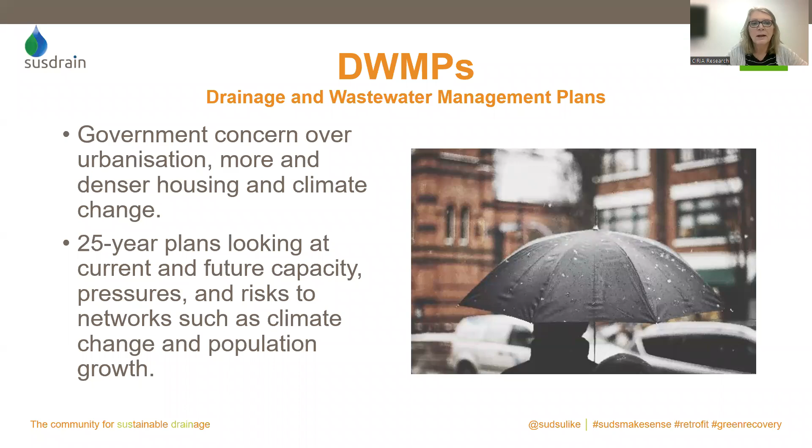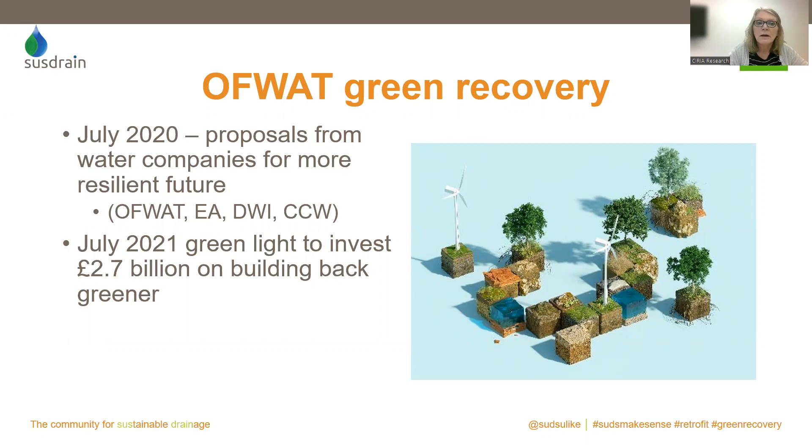So that's gone from the drivers to the detail of what's happening. We've also... Ofwat is the water regulator, and following the COVID pandemic, asked water companies for proposals for a more resilient future, and a year later gave the green light to invest money on building back greener. And these were some of the projects that were successful in being able to invest that money in green recovery projects, and we're going to hear about one of those very shortly.

The outcomes that Ofwat visualised were allowing water companies to take action on particularly pressing environmental issues, but while benefiting customers and helping to recover post-COVID, and trialling innovative ways of working. We've also got to remember the big picture, and had a conversation last night with a retired colleague from Yorkshire Water, who's also been very heavily involved in water strategy for a number of years, and reminded me that we should think about the big picture, that we need a resilient water environment for the future, and water infrastructure requires investment.

Only about 1% of the world's fresh water is easily accessible for human use, and we should look after that. But there are risks and opportunities related to water that will affect economic development and prosperity. And we should also remember that we're all aiming towards delivery of sustainable development goals, and we won't succeed unless our engineering, innovation and ingenuity create cities that people will want to live in. So thank you, Brian, for reminding us of that.

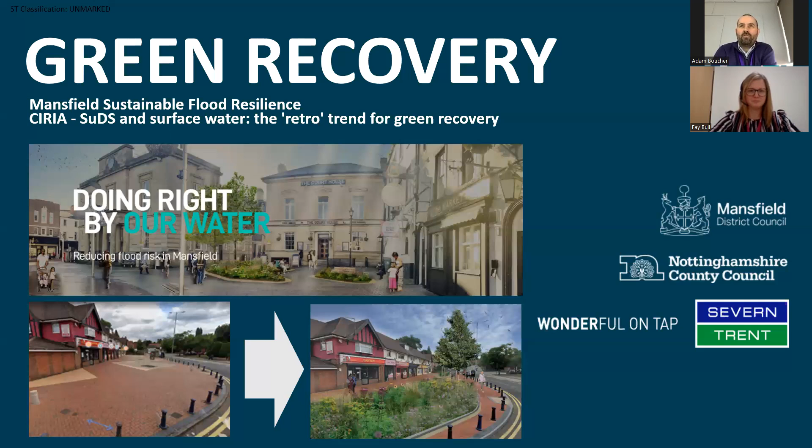Thanks, Fay. Yeah, so our ambition is to rewind the clock and retrofit in Mansfield. And effectively, as you can see on this first slide, turn some of these areas that were thriving verges and green spaces that have been paved over for maintenance reasons, the majority of them, into thriving verge rain gardens, etc. So you can see a good example on the bottom there. So we're investing £76 million of customer money as a result of the green recovery, post-pandemic recovery from Ofwat, on nature-based solutions to protect communities from flooding, 90,000 people in the Mansfield catchment. We're also going to get that secondary benefit of reducing storm overflow activations by taking so much surface water out of a network that is nearly wholly combined within the market town of Mansfield.

So we've got a local authority, Mansfield District Council, who are the planning authority, and also the neighbourhood town centre managers. And then we've got a highway authority and lead local flood authority in Nottinghamshire County Council. So it's a dual council, and we've actually embedded ourselves into Mansfield District Council's building to make sure that we're creating that collaborative team. So our objective is to provide 58 million litres of surface water equivalent storage. So that's a massive volume, never been done on this scale. And what we're hoping is this provides a blueprint for how we can manage flood risk in the future. And obviously it makes Mansfield a bit of a fresher, greener place to live as well.

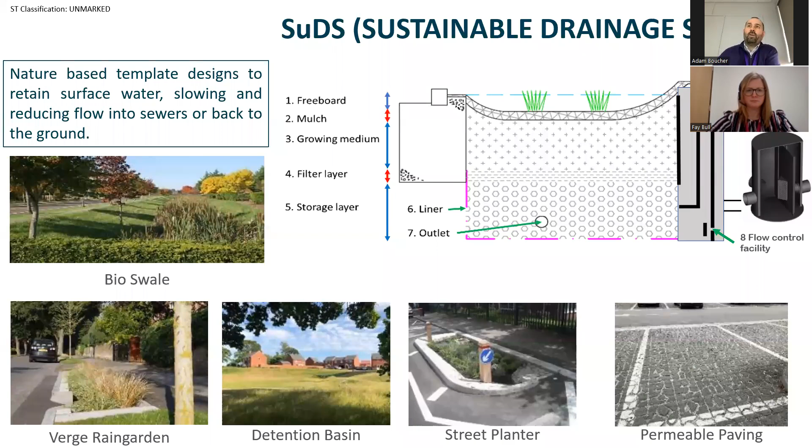Some of the benefits that obviously SuDS offer us is not just about reducing storm overflow magnitude or also reducing the flood risk. We're obviously looking in this project to develop many different additional benefits, such as cleaning the surface water much better than we do direct to the river at this moment in time. We also get an energy and carbon reduction, we think, where we can infiltrate, because we are currently pumping at the sewage treatment works to actually treat.

We're going to create some local habitat. But what I really like is the partnership funding opportunities that SuDS delivers, and I'll show you an example in a minute, as well as creating the health and well-being opportunities and green space, the town cooling, and then being so variable with regards to a large basin through to a small highway intervention.

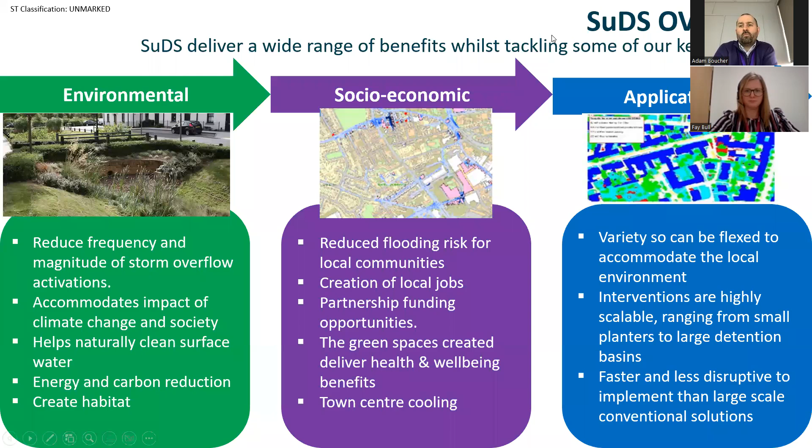So I just want to touch on the partnership side now and how we're working with Mansfield District Council from the master plan point of view within the town centre. So I think we've seen examples like this before, Sheffield, for example, where there have been schemes that are kind of about connecting people, creating place, making opportunities, and then also secondary managing water. Mansfield District Council are currently going through their master plan ambition, similar to what Sheffield did.

And they've got lots of issues because they're not, like Sheffield, a unitary authority. They are very much part of a dual authority with Nottinghamshire County Council. So there's more challenges with regards to managing their traffic within the town. And what we're trying to do is also bake their master plan in with our project. And we're already seeing some fantastic partnership working opportunities around that, managing the water as well as connecting people and creating place. Next slide, please.

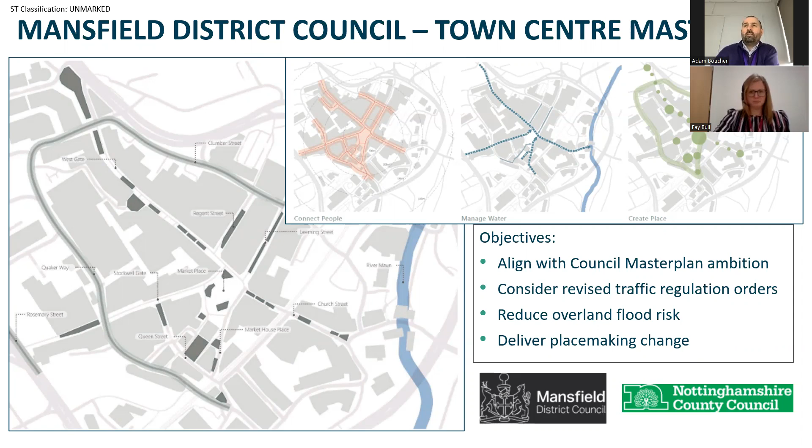One of those opportunities that has come around is this fantastic green space that we've created in an old car park. You can see from the top right hand corner, this is behind the old town hall, was the old indoor market. They knocked it down, created a hard standing car park. Now they're getting that out as part of their master plan ambition, is to remove the cars to the outside the inner ring road. And so they were originally just going to do a green space, tiered cascading kind of green space with some seating in.

When we got our award, we said, would you be interested in putting some verge rain gardens into your green space? And we could also, in the dark area you can see, which was the old loading bays for the old indoor market, which became the entrance, we could also get another large verge rain garden in there now, as well as on the front of the town hall at the side of the courthouse there, get a couple of extra verge rain gardens in.

And feed surface water, not just from the local highway environment, but also we've fed this in from the brand new bus station that sits behind the town hall, where they've constructed a surface water system that came directly out of the bus station complex and drops directly into our combined sewer. So we've managed through our project and their project to create this dual purpose, dual beneficial scheme that is going to actually store thousands upon thousands of litres of surface water now, not just provide that green space that was their original project.

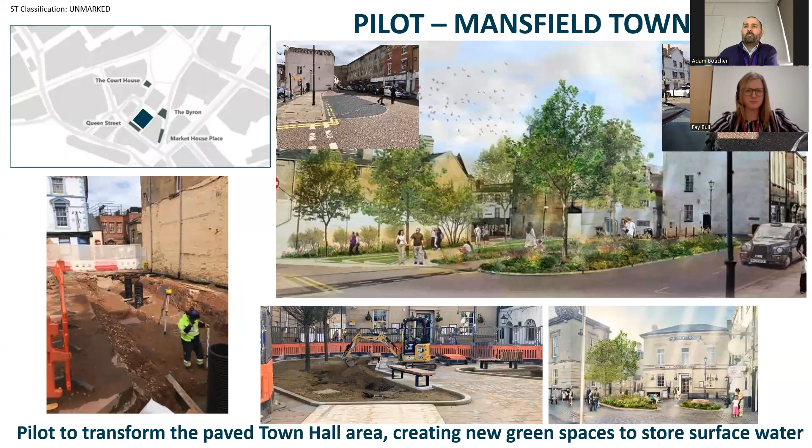And I think this is a real example of how SuDS projects, if they're promoted well, can tie in with town funding, levelling up funding, or green space ambition that local authorities have to create this dual opportunity. Fay, do you want to give us some examples of the residential elements?

Yeah, thanks, Adam. So in addition to the pilot studies that took place or are taking place in the town centre, which are about how we integrate those different opportunities, Adam tasked us at AECOM with looking at a residential suburb of Mansfield, an area called Ravensdale, which is to the southeast of the town centre. It was basically given to us as a blank canvas, and Adam's remit was you go and find as much as you can in terms of SuDS opportunities.

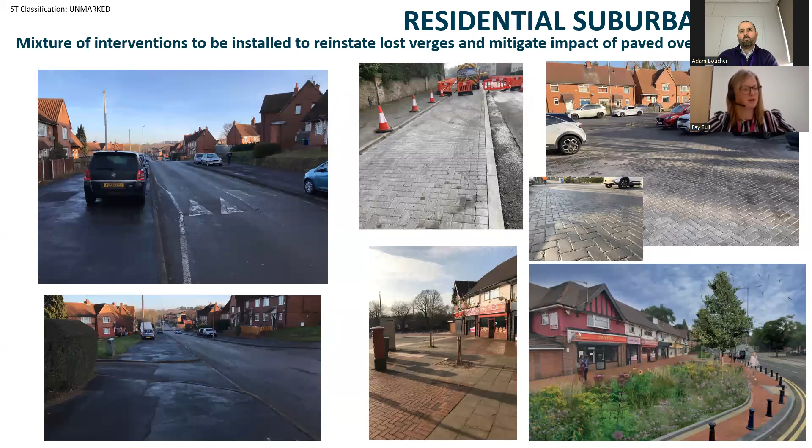So in the pilot phase, we got the low-hanging fruit, the bigger, juicier interventions, and then we went back around and we found a lot more interventions, but much smaller in terms of the return. And this is the end-to-end process that we are following. So the blue boxes there show you quite a normal design process.

So bear in mind here that when we pick up each of the catchments that we're working on, we pick them up as a blank sheet of paper, and we have to go through a desktop site selection process. And working with ARUP, Severn Trent and AECOM, all working together in collaboration, we've developed some really useful bespoke tools to help us to identify potential sites quickly, and then prioritise them so that we're focusing our design effort on the interventions that will give us the maximum yield.

We then look at desktop constraints, so utilities, land ownership and highway considerations, as it says there on the slide, and we're trying to move quite quickly into outline design. Now, to standardise and streamline that outline design, we've developed some template designs. As Adam said at the beginning, there were no standards to work from, so we've developed template designs for this project, and we've worked very closely with the Highway Authority, which is Nottinghamshire County Council, to make sure that we've got their buy-in to those outline designs.

And at the end of our outline design phase, we go through a review process with the Highway Authority to take account of any concerns or considerations from them. And then we move into detailed design. So the contractor picks this up at detailed design stage. And again, there's further discussions there and further sign off with the Highway Authority before it moves into the construction phase and the handover and closeout.

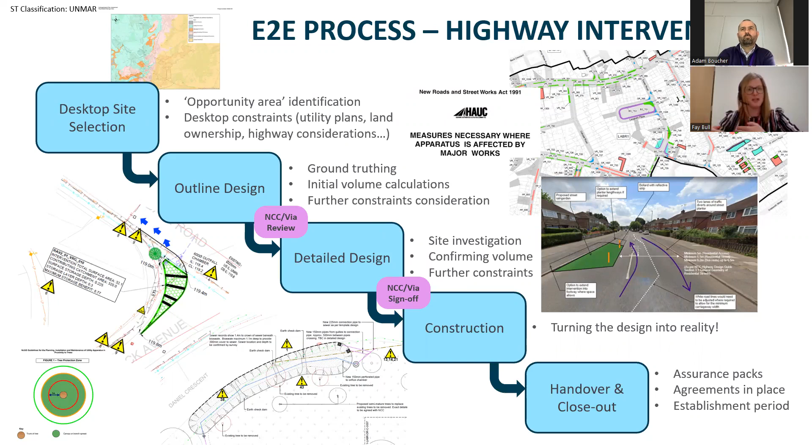So thinking about the whole of the town, the whole of Mansfield, how the traffic management will work when we're having to close roads or put in traffic management, that is a massive endeavour, and it's a very ambitious project to be working on. There's a lot of pressure, very fast moving, very handle turning in terms of trying to get a production line of designs that go through to the contractor to then start to build.

And then, in addition to the highways SuDS, we've also got a programme of detention basins. Now this particular detention basin has moved on a bit since this slide, but this is Racecourse Park. It drains an area of 13,000 metres squared. And for the 10-year storm, this is designed to contain 600 metres cubed, and it contains the 30-year event within its freeboard. So we are looking at these bigger, larger detention basins as well, generally in Mansfield District Council owned land.

So we're working very closely in partnership with Mansfield District Council to understand what their design considerations need to be, and what we are working with in terms of their land going forward. This catchment in particular is an already separated surface water network. It drops into the combined sewer, so we're proposing to take that out of the combined sewer, drop it into this detention basin, therefore reducing the amount of surface water going into the combined network.

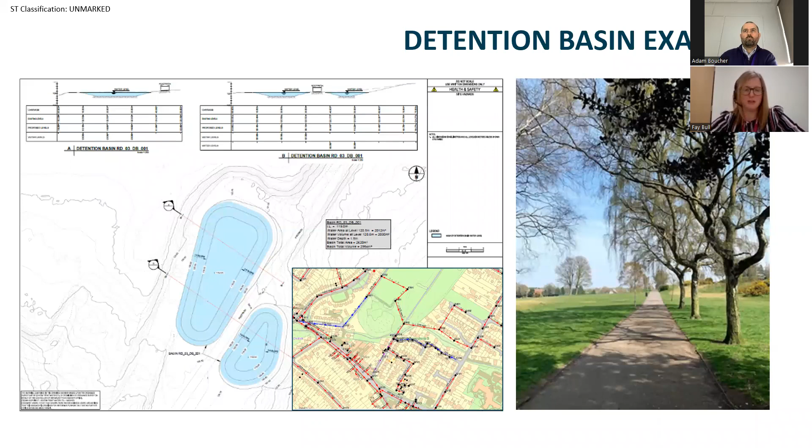Thanks, Fay. I'll hand back to Adam now to talk through some of the powers that are being used and the ownership and maintenance going forward.

Yeah, thanks, Fay. So we've got a really unique opportunity in Mansfield to trial potentially how we could in the future work as a water company intercepting other people's water. Fortunately, there's this section within the Water Industry Act, section 114A, which allows us to install drainage systems to alleviate the entry of others' water into the public sewerage network. So effectively, that's the power that we are laying them under.

And we will be adopting and maintaining everything that is green, so verge rain gardens through to bioretention tree pits on this graphic that you can see on the left hand side. The only two elements we won't be taking on, and Ofwat have made this quite clear, is that the permeable paving will be handed over to the Highway Authority, and that's the expectation. And thankfully, NCC have done a lot of work with us to take that on board.

And the other one is rainwater downpipe planters, where we will be working on non-household areas to intercept roof water with above ground installations, or even blue-green roofs where opportunities arise. So that's the other one that we won't be taking on as the authority, but we will be looking after everything else for life. So that brings me on to third-party contributions.

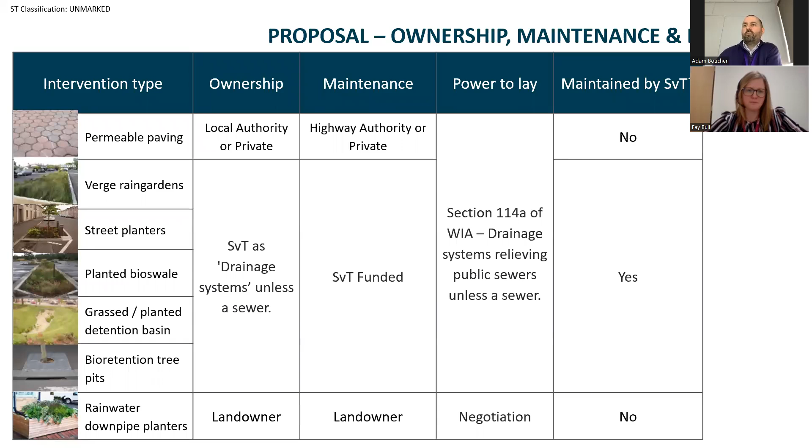We are providing 89% of the costs, that's £76 million. The expectation from the regulator is that the other 11%, effectively the top up from grey to green solution, will be provided by third parties that benefit from the scheme. So we've got lots of opportunity to work with our local authorities to try and get some direct contribution, although at this time, with the current cost pressures everybody's facing, that's really proving difficult.

But we do have some fantastic opportunities with match funding, co-delivery partnership. We've just seen a great example of that. And in kind, land value or advice or fees to be transferred. And then obviously the permeable paving is one element as well with regards to commuted sums and the authority taking that on. So there's lots of opportunities for people to contribute.

But also we think we've come upon something with regards to our non-household customers, our largest sites, where we can actually offer them a surface water incentive discount for their surface water charge, based on them allowing us to come onto their site and reduce their contribution to the sewerage network by a minimum of 30%. So we're currently exploring installing permeable paving, green interventions where possible, and offering a discount for a period of time, which would become their contribution. After that period, they then receive that benefit for themselves.

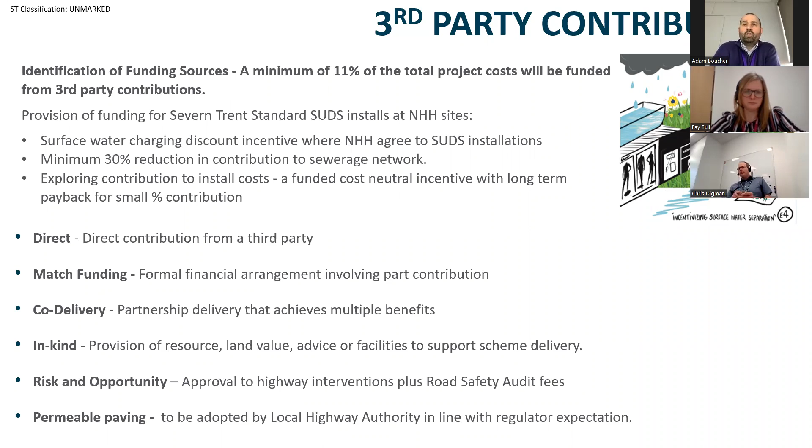And the last opportunity really is around developers with regards to brownfield development, and this is a great example where we're seeing demolished terrace properties with existing connections, brownfield sites. So it's an application that we would normally receive from a developer with a 30% reduced runoff condition placed upon it.

And what we're doing with the local authority MDC again is challenging them with regards to the construction of 77 new properties to basically do a Schedule 3 trial and hang on to all that water landing on that site within proper SuDS, not just direct gullies to flood risk assessment storage, but verge rain gardens and other interventions, with us trying to provide the top-up funding between their normal flood risk assessment storage and our SuDS standards that we would accept.

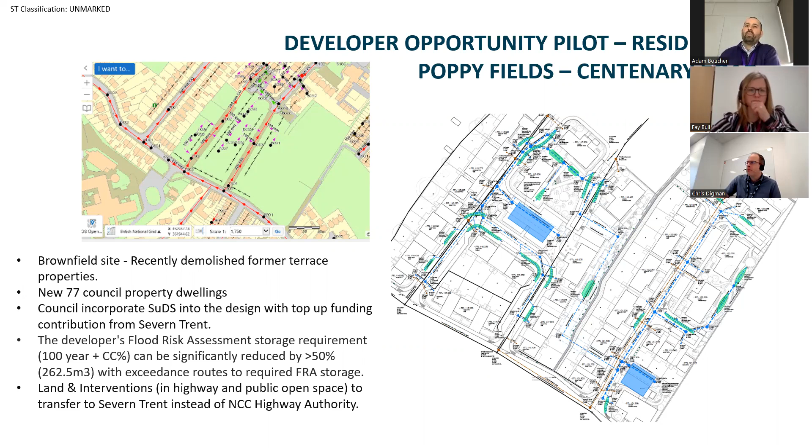So this is going to be a bit of a flagship project and something that we're looking to replicate throughout any brownfield development in Mansfield over the next couple of years. Finally, really just touching on the point that Chris made at the beginning around how important it is to engage with the local community, not only just from a consult and inform on what's happening, when it's happening and how it's happening, but also the big thing around this one is the why we are doing it. And I think that's where we can really build up support.

We're also looking to work with schools and community groups. We've already done assemblies at all 34 schools within the town. So we've got this real opportunity to engage and get support. There's obviously a lot of bad press at the moment, and a lot of interest around storm overflow activations and also flood risk. So I think this can only be a positive scheme, but it's how we go around and do the sell with regards to the interventions that are going in and build community support to not only understand the why, but also get bought into looking after some of these interventions in the long term.

I hope that's given you a bit of an introduction to Mansfield, and we're willing to take any questions. Adam and Fay, thank you very much for that. Really interesting to hear that and the progress of the journey that you've been on. We've got time for just one question. We're going to come back for a lot more later on, and possibly you may get the chance to type some answers to some of the questions that come in as well.

But if we just go to the one which was the hottest topic in terms of votes, from Amanda, asking how are Mansfield managing skills and funding for management/maintenance to ensure SuDS, especially planting schemes, thrive in the long term? That's an easy one, because Ofwat, the regulator, have made it very clear within the final determination that we've got a unique opportunity of looking after them ourselves. So that's the big difference. We can fund this through our forthcoming price review in 2024.

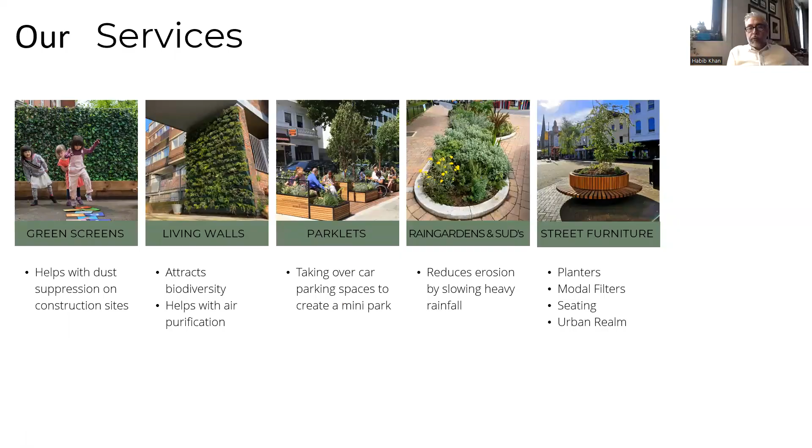Our services are broken into, obviously I'm going to talk today about SuDS and rain gardens, but we do a lot of street furniture, these very large planters. Everybody agrees we need more trees in our public landscape, but it's very hard to put tree pits in because of the amount of services around. Therefore, a lot of our work is overground. We do a lot of parklets as well, living walls, green screens, and green roofs as well. But today I'm focusing on our rain gardens and our work with SuDS. We'll start with rain gardens, and then look at the SuDS planters.

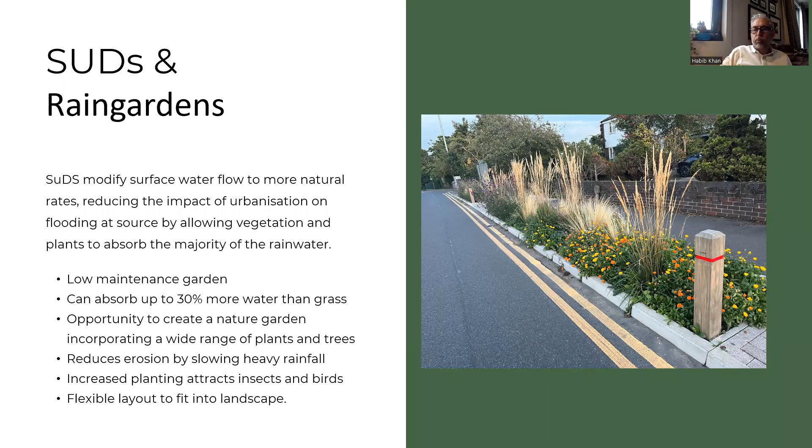This is becoming more and more popular with a lot of our Local Authority clients. If any of you are not familiar, rain gardens are essentially a form of SuDS that channel surface water into a specially designed water absorbent garden, planted with hardy perennials, designed to absorb excess rainwater, slow it down, and relieve receiving systems such as existing storm drains. Most of our projects are with Thames Water, so they're connecting to Thames Water sewer connections.

But they do more than just capturing rainwater. We incorporate plants that are specifically designed to attract pollinating insects. So they create a biohabitat, and we provide a corridor of biodiversity around urban town centres. We incorporate a lot of trees as well. It's a fantastic opportunity to incorporate trees whenever you're doing a rain garden. This is a drop curb rain garden in Hackney. We've done about 12 rain gardens in Hackney. We position them so they're appreciated by the public as a pocket park rather than purely functional.

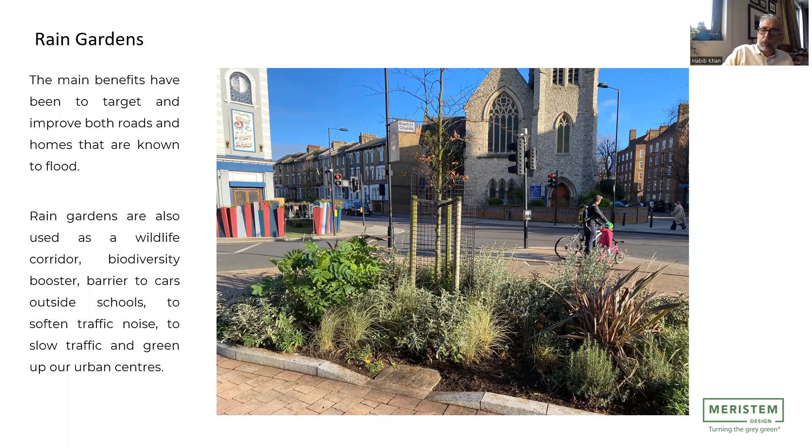purposes. One of the big things we've been involved in recently is community rain gardens. I think this might be a first, because these are rain gardens which right from the outset are carried out in collaboration with community groups. There are hundreds of community groups across London. A lot of them are registered. They work with local authorities, and this was right from the outset.

We did the planting plan. We sent them the planting plan. They had a look at it. If they wanted to make suggestions about their favourite plants, they could. We looked at their plant selection, and if it was suitable for a rain garden, we'd include it in there.

This was the day we actually did the installation of the rain gardens. A lot of the residents on the streets came out. You can see the cones in the background. We closed the road as well. So they kind of played around with the planting plan, which is fine. They have that say in it. They have their ownership on it. Some of the plants, they actually went out and selected, and it was very, very popular. So they had ownership right from the beginning.

This is called the Coppermill Community Group. There's about 22 rain gardens in one area of Waltham Forest, and it was done with London Borough of Waltham Forest Council. But engaging with the community on the day itself is important. So if you can get children out there, get them out. Then we did close the road for the day, and the feedback from that was really great. And we rolled this out to more and more communities throughout London. So this was the first one.

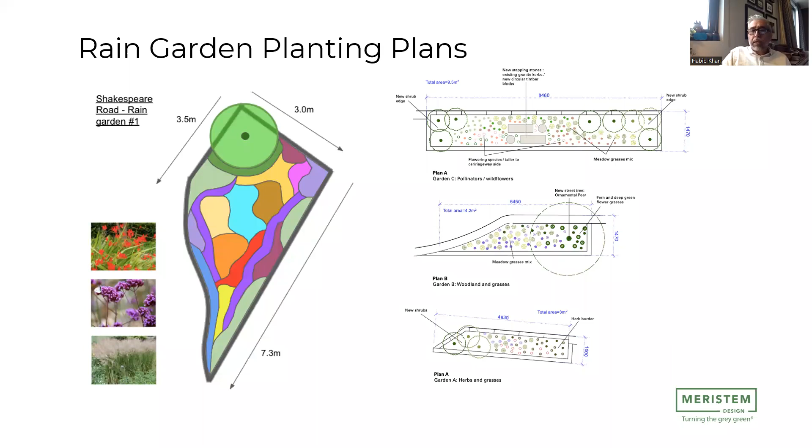We will do a planting plan as well for our rain garden. So again, if there's trees going in there, if there's herbs going in there, whereabouts are they going to be positioned in that particular area? So you need to be careful. Some people like to have height toward the back of the rain garden. You need to be wary when you've got cars in that area. You've got areas here, for example, with stepping stones through the rain gardens, and we've got rain gardens specifically designed with seating inside. So it is like a mini pocket park on the end of your road that the residents can enjoy. But yeah, a good planting plan to begin with shows you where the different plants are going to be incorporated into that area.

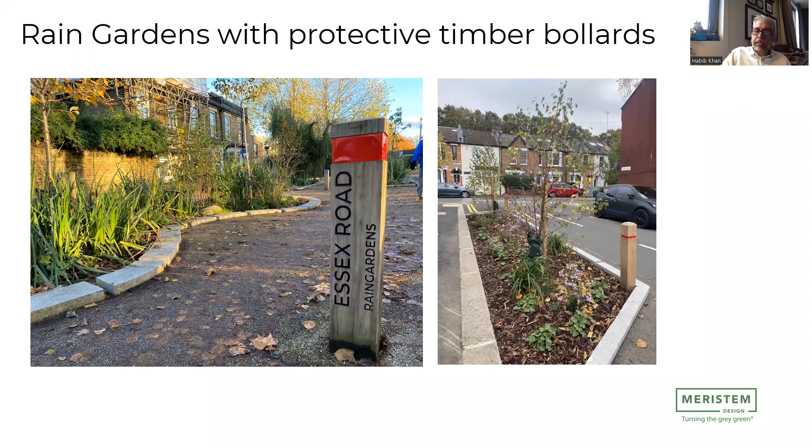We do use protective timber bollards, especially if you're going to put them onto the road, because you will get vehicles. You can picture a delivery vehicle reversing into the rain garden. So having the timber bollards works really well. This is Waltham Forest again. This is the Essex Road rain gardens, and it also provides an identity, and it tells people it's a rain garden. We do have other rain gardens with more information about the plant species used, so the residents can look and identify the plants in there. So it's useful to have the timber bollards.

You can retrofit tree pits into rain gardens. So this tree's been there for quite a few years, and what they've done is adapted the curbstones around it and turned it into a mini rain garden.

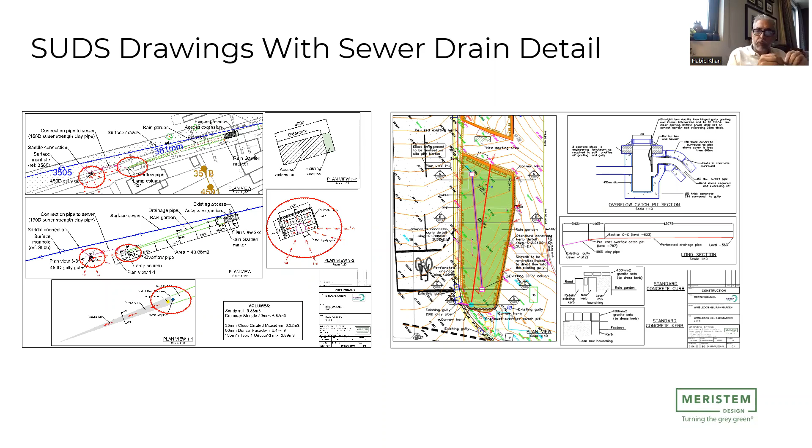As I said, there is a school on the right, so it does cause a lot of problems when this does flood. So this is what it's like before we came in there. So we work with Merton Council and Thames Water. They provide the rainwater sewer pipe connection drawings, told us where they were, how deep they were. We then did the technical drawings. So our own engineer drew the SuDS drawings.

It's very important to have the right level of freeboard, the right amount of compost and soil, and then how it's connected into the perforated pipes connected into the existing pipe sewers themselves. For the drawings we did, we supplied them. Merton Council's own contractors did the excavation works themselves and connected it into the pipe work, but we came along, did the shingle, the membrane, the soil, and the landscaping.

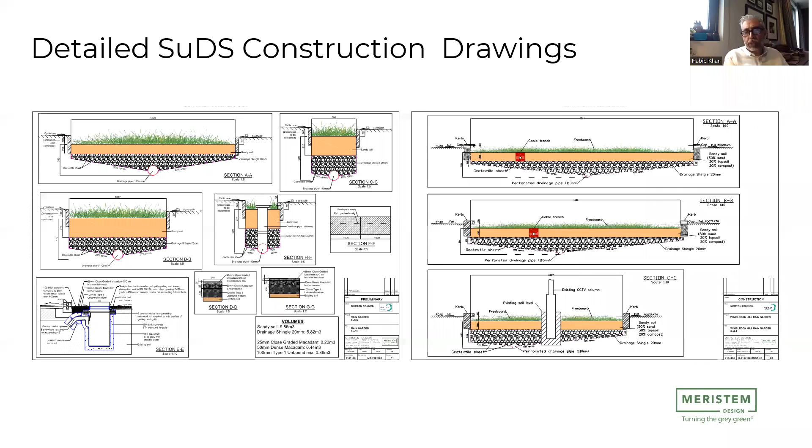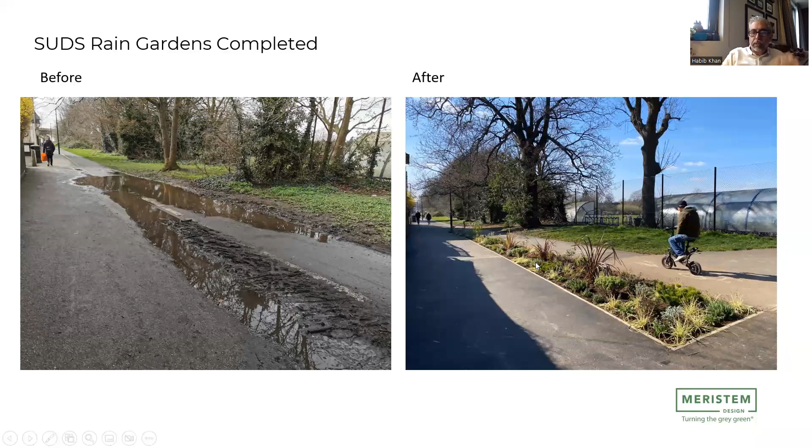So this is what it looks like afterwards. Huge difference. To date, so far, they've not had any standing water. There is a Thames Water sewer pipe running directly through this particular rain garden. It's connected with the pipe work into the sewer connection.

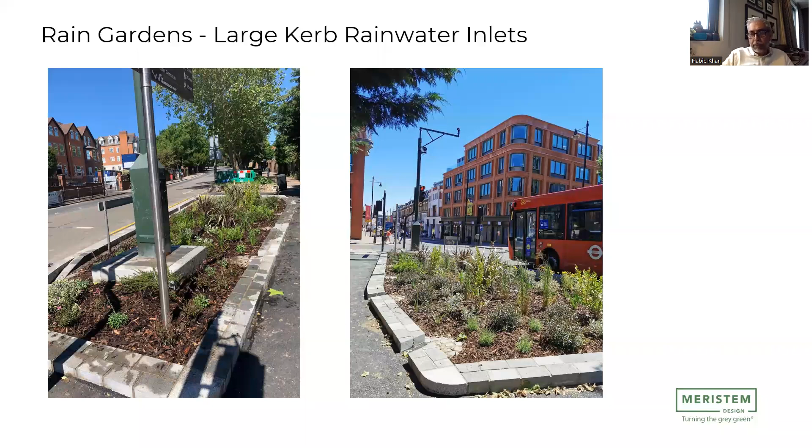Make sure you have sufficient depth. We've seen a lot of rain gardens, and the actual soil is level with the kerb, and you just can't believe why they would do that. You do need a minimum 200 to 300 millimeters depth for the freeboard, and then that allows the rainwater capture to be sufficient.

And having the right ratio of the soil is also important as well for the substrate. So here, this is according to the LDA design, which is fantastic. Which is what we use: 50% sand, 30% topsoil, and 20% compost. That is the same mixture that we use ourselves as well.

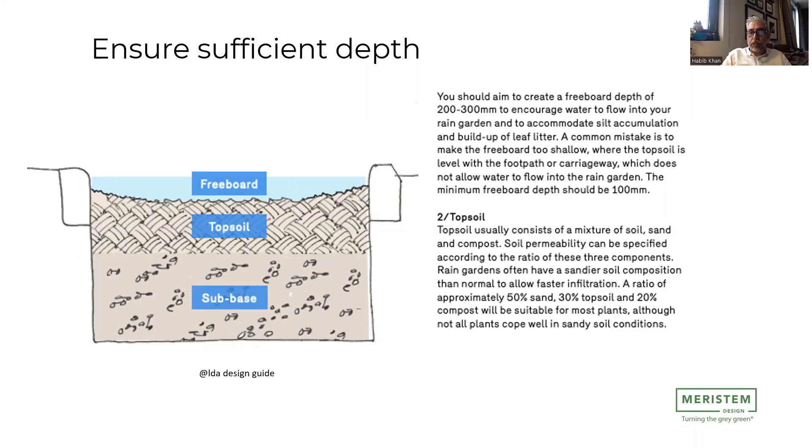Maintenance, it's very important to have the maintenance. I think this is often overlooked. You have engineers, you put it in there. That's the easy side, but who's going to maintain it? Rain gardens are not self-sufficient. In the first year in London, we go out 30 times a year.

Perhaps if you're further up north or out west, perhaps it rains more often. You don't need to go out 30 times a year. But in the first year, we do go out 30 times a year. Second year, it drops down to about 15 times a year. And then you can get away with maybe half a dozen times a year.

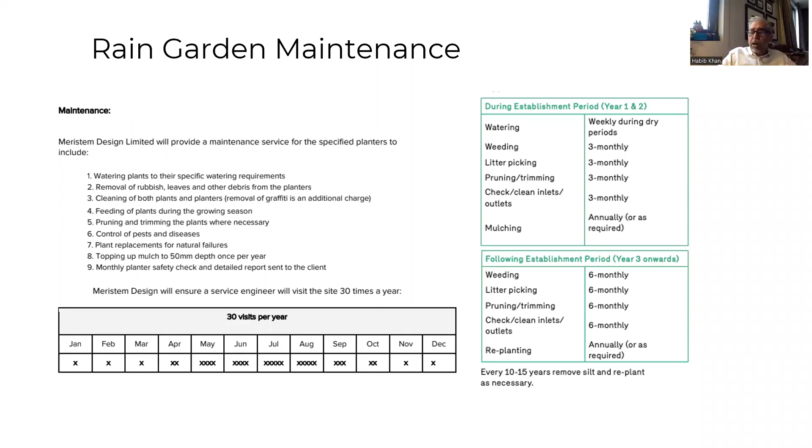But to do the watering, the weeding, the plants, we also do collect litter. So it is important to have maintenance in place, and as I said we often do provide a 3-year maintenance package. After 3 years, they are fairly self-sufficient, with an established root system.

If you can collaborate with local artists, make a real feature of your rain garden, please do so. We do a lot of rain gardens with schools as well. So outside schools, there's a lot of funding at the moment now with the school streets as well to do things to decarbonize the schools.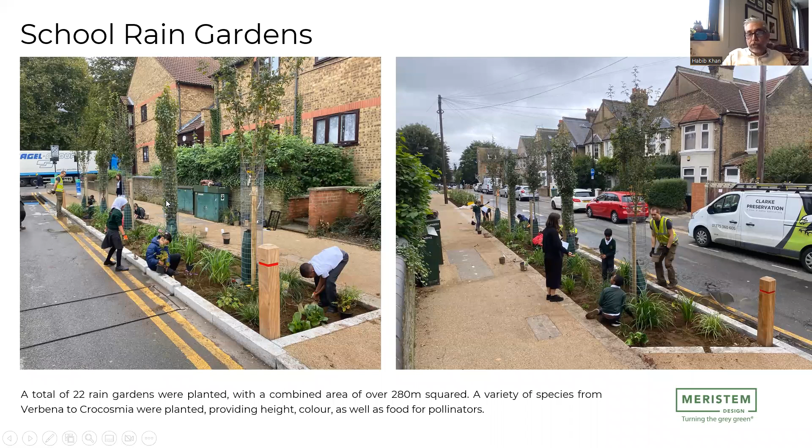So outside of the schools, we put in rain gardens, and the school children come out. We do workshops inside the schools, sort of the importance of nature, connecting plants with humans and air quality, and they can get an input on the kind of trees. For example, a lot of the trees here, they've asked for fruit trees; apple trees, pear trees, cherry trees are edible, so that's great. So they will enjoy the fruits of labour.

We do a lot of retrofitted planters with schools as well. So we picked up a contract last year with Thames Water, and we're working with Greater London Authority. We're working with 85 schools and their SuDS programs. We've installed over 900 SuDS planters across London's most flood-prone schools. 1 in 5 schools in London suffers from flooding, which is a big problem for the school itself.

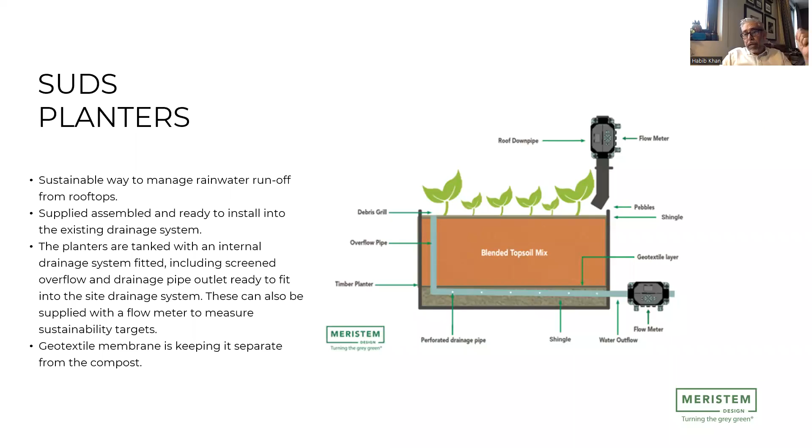SuDS planters, it's fairly straightforward. We do the adaptations of the downpipe into the rain planters itself with the permeable pipe. You can have flow meters if you want to see how much rainwater is captured going in, how much rainwater is captured going out. Planter detail, again, I can send it to you, but it's fairly straightforward.

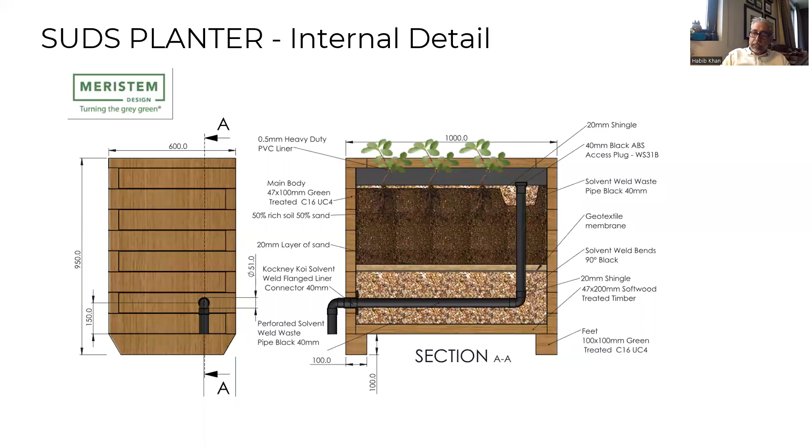We've got the shingles, we've got the permeable pipes, you've got emergency overflow, and we custom make this at any size. The smallest ones we do are 600 mil by 600 mil, but we're doing one at the moment right now at 9 meters long by 1 meter wide for a very large building. So you can have any size you want. We're also doing them in steel as well for Southwark Council and for a residential project.

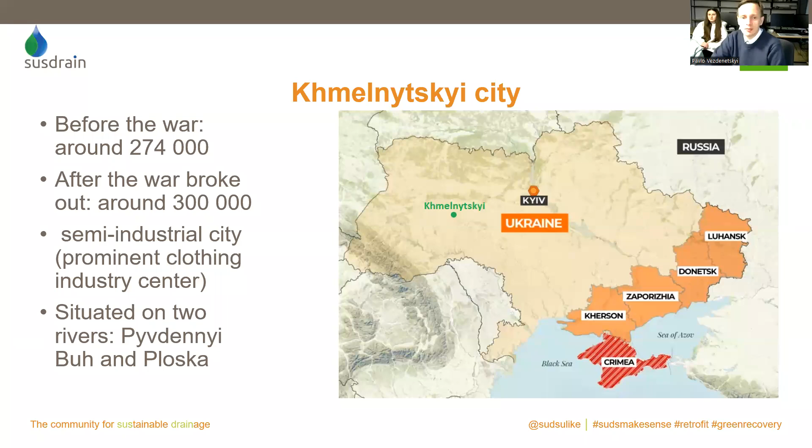And it's very important because Khmelnytskyi started at the time it was called Proskuriv. You see the similarity with the name Ploska River, Proskuriv. It was a development in the name, and in the middle of the 20th century, our city was renamed.

So as a board member of the NGO, I decided to engage stakeholders, and I found the most developing design bureau, Reifschneider Design Bureau. They are the main stakeholder because currently they have running projects, and they are willing to apply sustainable drainage systems in their projects, and they already have some experience with rain gardens, and those rain gardens actually work. Mr. Dmytro can confirm.

So in which projects do we want more SuDS? Here you can see Design Bureau Reifschneider. The first project is the residential complex Smart and Green, and another 3 projects are parks. The second, Youth Park, is a new project, and the third park will be the Park of Khmelnytskyi Heroes. It will also be a new project, and the fourth park, Chekman Park, already exists from the 1950s.

It's a very interesting place, but it needs to be a bit renovated, because the drainage system that was created in that area of Chekman Park is not being cared for properly. That's why we have problems with that. For me personally, it's a very, very important place. And my search for sustainable drainage actually started when I saw how polluted the water is in the open drainage channels in the park. But about that a little bit later.

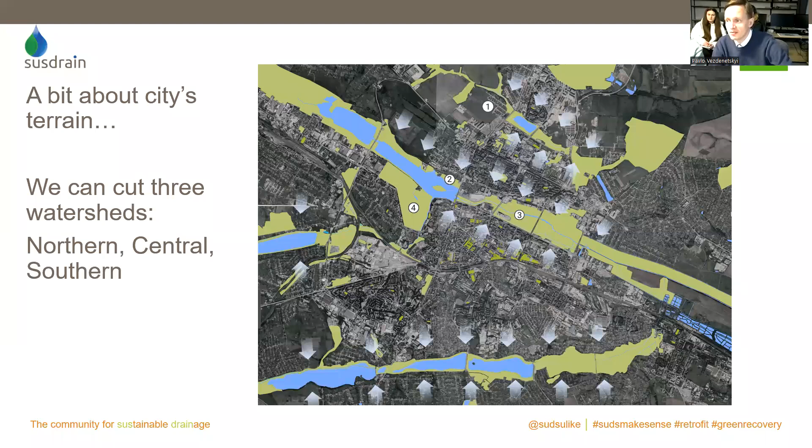And if we look at Khmelnytskyi, we can cut 3 watersheds: northern watershed, central watershed, and southern watershed. Another small river, Kudrenka, is beneath the picture. You see 3 rather big reservoirs on River Kudrenka. I have not mentioned it, but we actually have 3 rivers in Khmelnytskyi, not 2.

Smart and Green is only on paper now. So Reif-Schneider Design Bureau is willing to completely, from the blank, implement sustainable drainage. And the place is hilly, it's situated on the slope, and there is already apparent understanding that erosion problems will appear. That's why we should use open drainage system, and maybe with help of swales, we can create it in a natural way.

So let's proceed to another photo. Here you see the photo, aerial view of the northern part of the city, and that white outline shows where the future smart and green housing complex will be, and the water flows from that place to that lake. You see already the lake, and I'm afraid that water quality in the lake will decrease when a residential complex appears, because very often our Ukrainian constructors completely rely on underground drainage, on asbestos pipes. Yes, we still use them a lot in Ukraine. It's not prohibited to that extent as in the West.

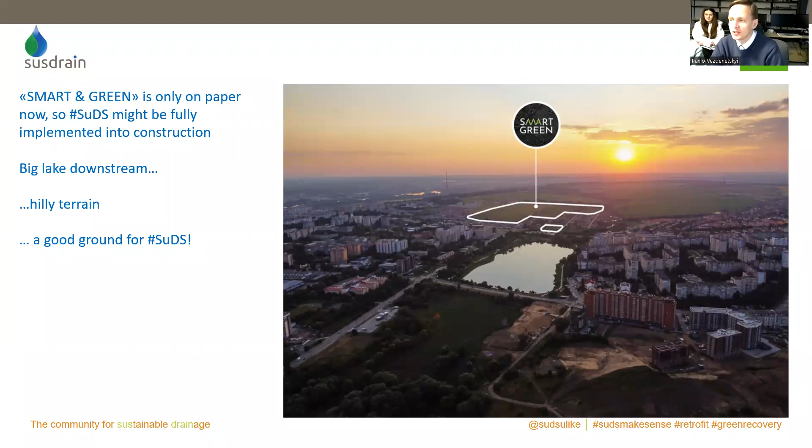So it's a good place to join our efforts and to apply sustainable drainage systems for that white outlined area. And the team of Design Bureau Reif-Schneider is willing to cooperate and to have maybe a sort of peer support. So let's proceed. Here you see how it will look like as our first idea. Sustainable drainage is not completely applied here.

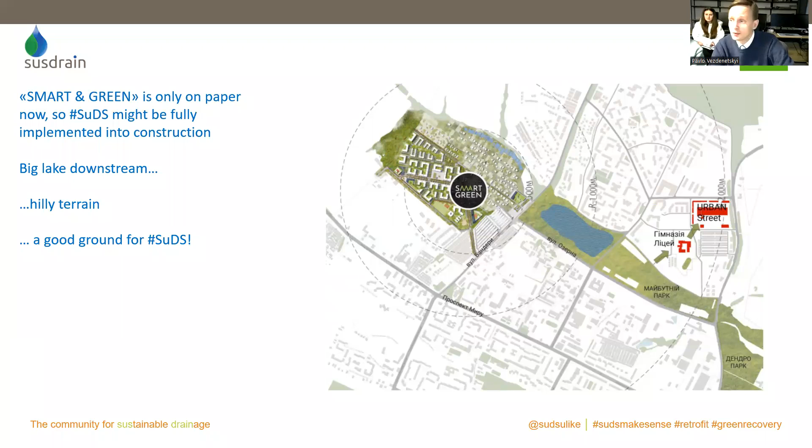So you see different types of housing. Closer to the waterway, dimensions of housing are smaller, and on the hill, dimensions of the housing are higher. So we have a big lake downstream, you see in the center, we have hilly terrain, and we have a good ground for sustainable drainage systems. So a bit closer look for the future view of the smart and green residential complex.

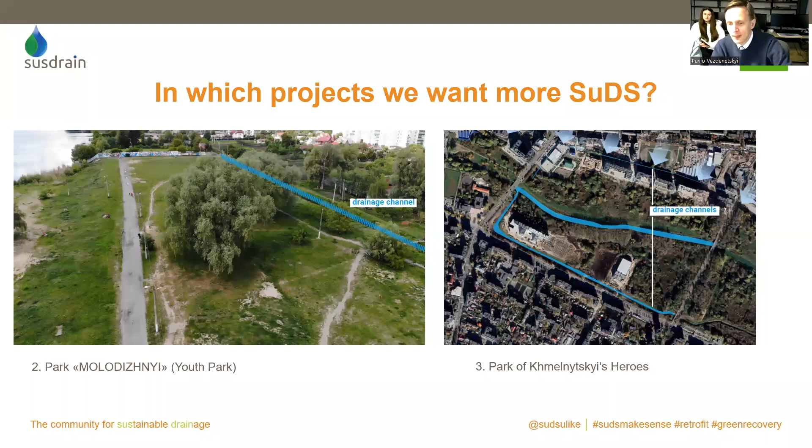And previously, when I was at school, I remember there was an open drainage channel. And when there was an open drainage channel instead of that underground pipe, the water quality apparently was much better, because that open drainage channel worked a little bit like a sedimentation channel. At the end of that open drainage channel, the quality of the water was much better.

But maybe 5 or 6 years ago, the housing complex appeared. You see, maybe, on the picture, but trees are before it. So 2 underground pipes for drainage were put in place, and that much increased the velocity of the flow. And all dirty water from the streets, where the park ends, we have a small watershed area for that drainage system, and all the solids, all the pollution flows very quickly to this park channel.

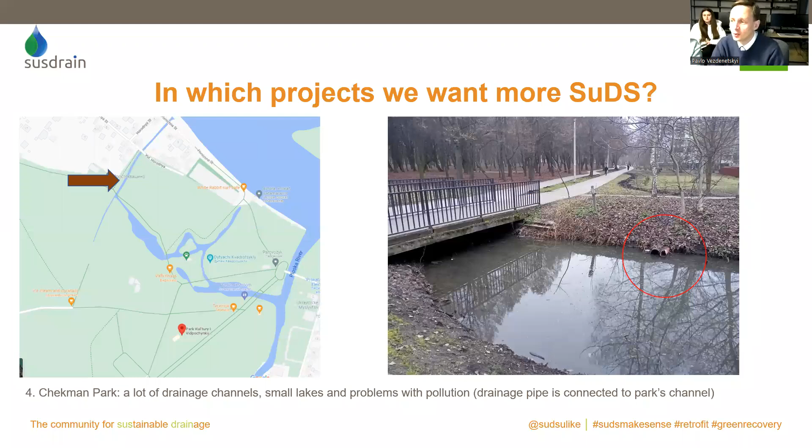Maybe the main obstacle for us is a persistent opinion that open drainage is worse than underground pipes. It's always a discussion, because city authorities prefer underground pipes. I don't know why, but they always choose the more expensive and less nature-friendly solution. So we have somehow to persuade them to use nature-based technologies.

So I think, please excuse me, what we are looking for, yes, maybe small consultation for implementation, peer support, maybe your ideas, your criticism. We can share our experience with sustainable drainage systems, and what we can give is our devotion to implementation of such. Also support of Reich Schneider Design Bureau.

Olena, hello. So Mrs. Olena and Mr. Dmitro are here and are learning from your manuals that are of excellent quality, and I have not seen yet so detailed a manual like your manual on construction of SuDS, where everything is put in a proper place, and you have shown how to do it properly and how not to do it, what to avoid.

Yes, and our small NGO also is willing to promote sustainable drainage and is willing to share our experience with other cities and to help them, maybe also to help cities that are damaged by the war, because Khmelnytskyi fortunately is not that much damaged as other cities. So we are open to cooperation, and we will have a lot of work in reconstruction of our Ukrainian cities, and I'm sure we will be doing it together.